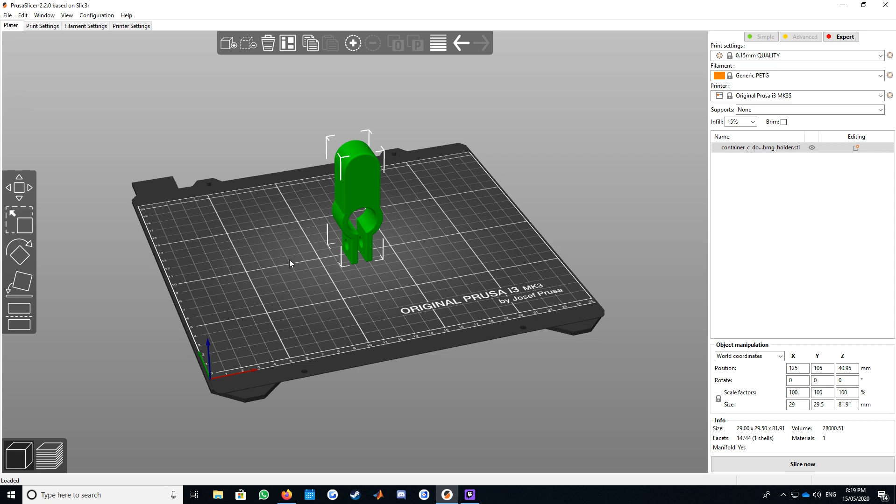This video is about how to set custom infill settings for PrusaSlicer, as I've been having a few problems with this part. I'll show you what the problem is and why I've been having problems.

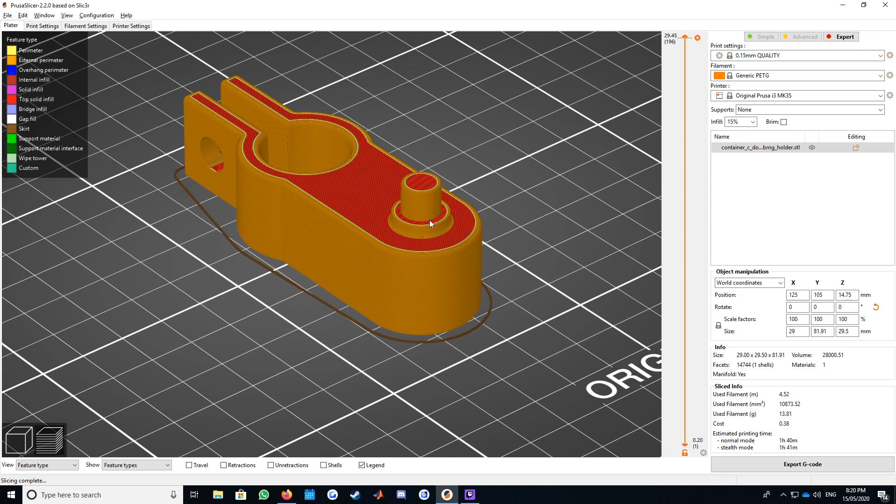Alright, so this part is designed to have a bearing pressed onto this shaft here. The bearing presses on fine, but after using this part for a little while, this shaft snaps clean off. And the reason it snaps off is because the perimeter settings are set to 2.

So have a look here. You can see this is the outer perimeter and that's the inner perimeter. It's just a real weak point of the part, and right there, that's where it snaps off every time.

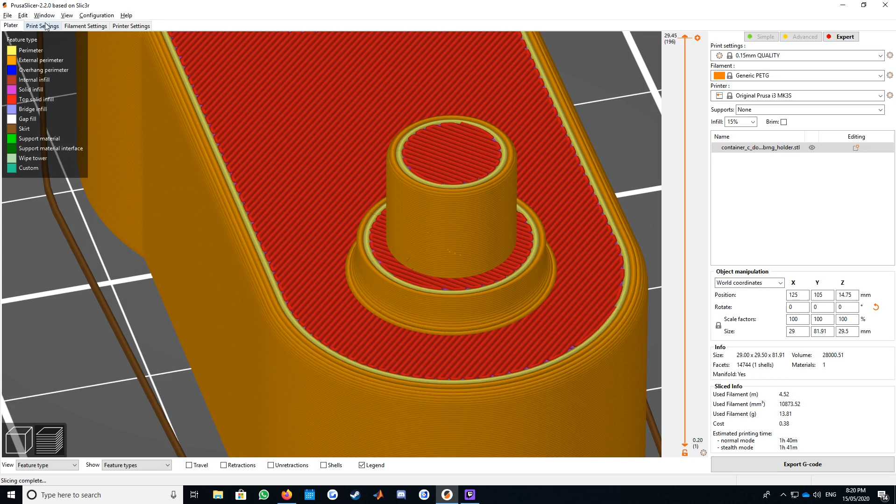So what I can do is go and increase my perimeters to 6, just like that. Slice. Okay, cool, that's made it much stronger. It's given me 6 perimeters.

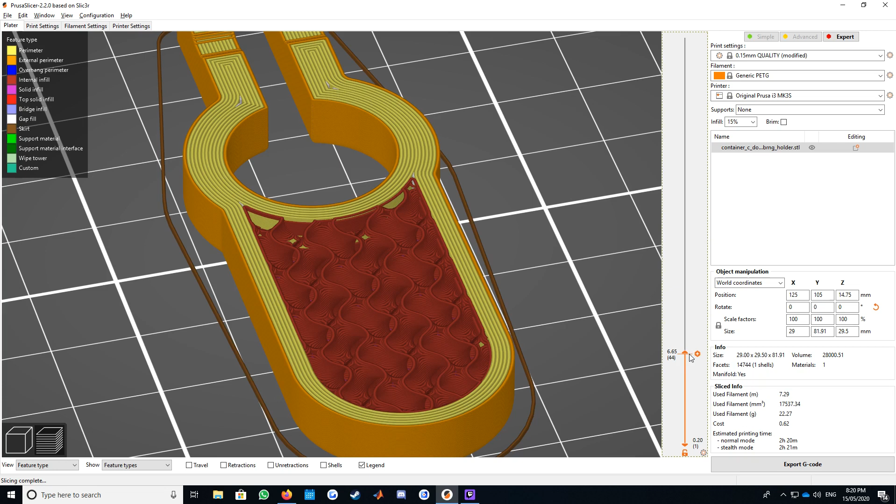Problem is, now I have 6 perimeters across the whole part. Have a look at the time it takes to print this whole thing now: 2 hours and 20 minutes, and 22 grams of filament. Well, that's a little bit longer than what it needs to be.

So I'm going to show you a way to avoid that. Let's go back here, set it back to 2 perimeters, slice now, and just check. Yep, we're back to our 2 perimeters all over.

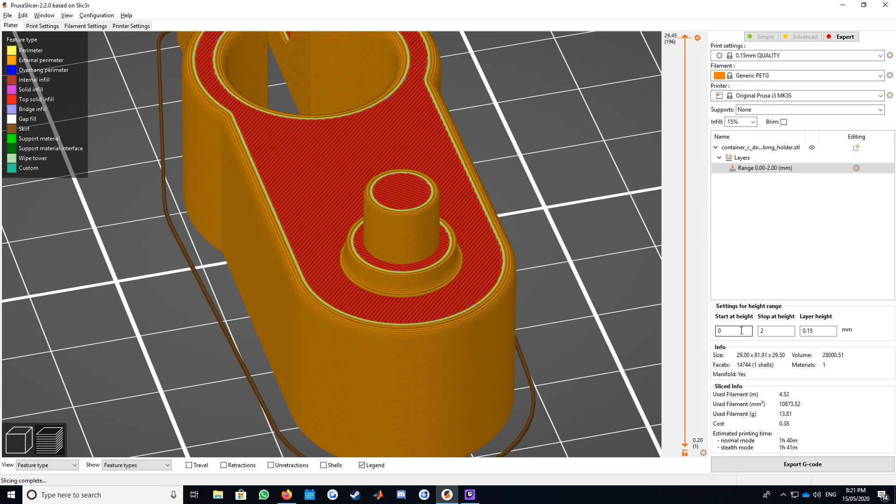So what we're going to do is come over into this box, right click on that, and go to height range modifier. Now it's given us this little thing here that says range, and if you look down it says start at height and stop at height.

So PrusaSlicer has given us a few little tools to make our job pretty easy. Let's click on that arrow, drag it up, and this is just going to help me focus on the area that I'm actually interested in.

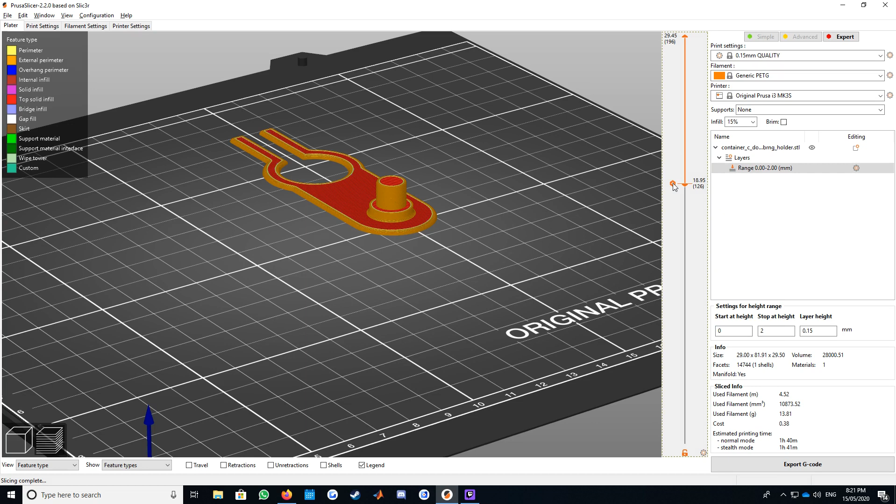So my idea is to increase the number of perimeters just in this top part of the part, and also change the infill density. Using this tool just gives me a better idea of where I want to start.

So I think around 19.5 millimeters is where I want to start, and I'll take it all the way to the top of the part. So start at height, I'm going to do 19.55, and I'm going to change that to 29.45.

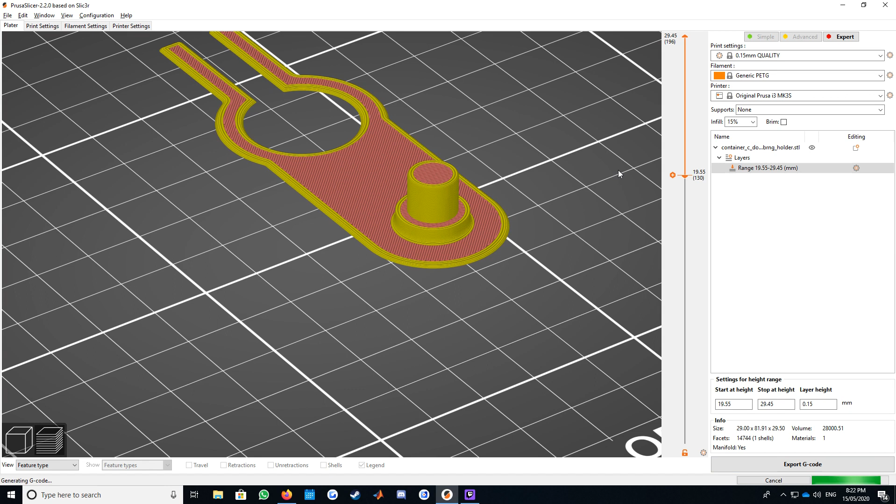Slice. Okay, what we do now is go into this range that we've just specified, and we're going to say, what do you want to happen in this range?

So we right click on the wheel, click infill, right click on the wheel again, click layers and perimeters, and now we've got a whole bunch of options here. We can change the fill density, the fill pattern, layers and perimeters, and all of these changes will take place just in this range of 19.55 to 29.45.

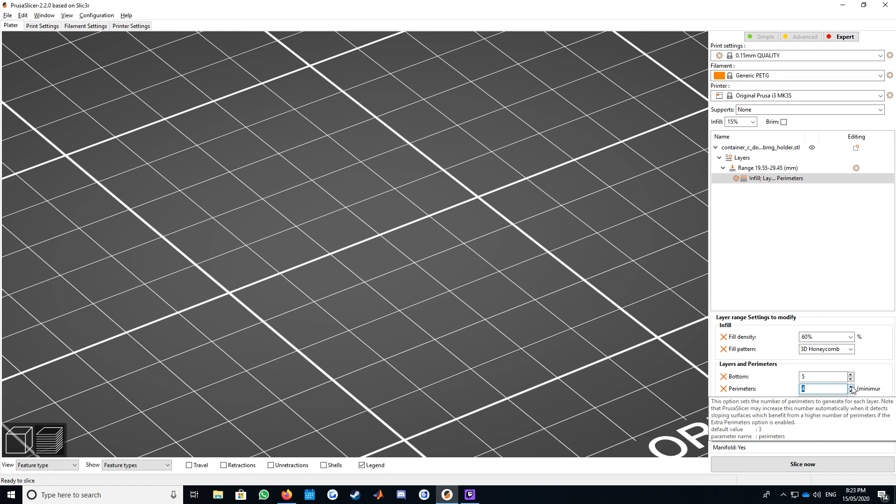So I'm going to bump the fill density up to 60%. I'll change this to 3D honeycomb, and I'm going to change the perimeters to 5. Yeah, 5 perimeters. Slice now.

Okay, and that's good. You can see straight away we've got 5 perimeters. Let's scroll down, and we've got our 3D honeycomb infill pattern. That looks pretty neat actually, that's the first time I've seen that.

Keep scrolling down, we've still got our 5 perimeters and our honeycomb pattern. And here we are at 19.55, this is the range that we specified. So at that height, we've got 2 perimeters.

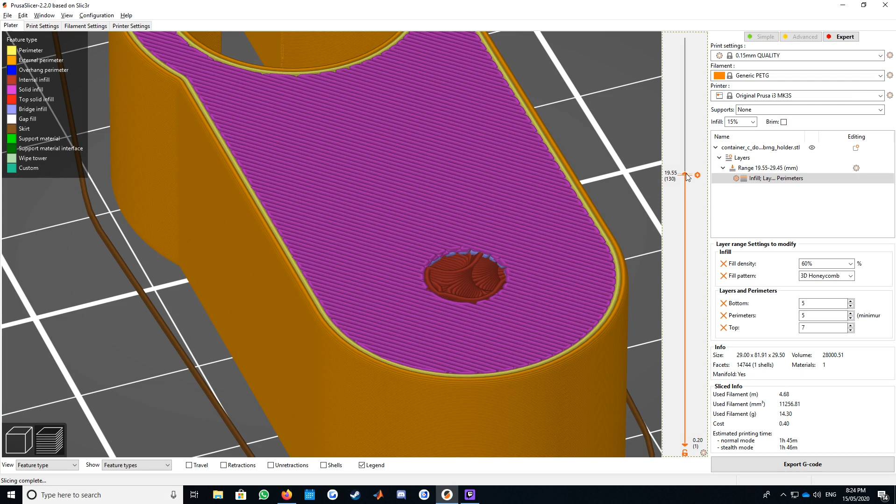If we scroll down, we've just got our regular 15% infill and 2 perimeters. But once we get to 19.55, that's where we start our 5 perimeters and our honeycomb pattern.

And so that's going to make this part a lot stronger. And look, we're saving, what's that? It's about 8 grams of filament and about 40 minutes of print time, which I think is a good saving. Anyway, I hope this video helps someone.